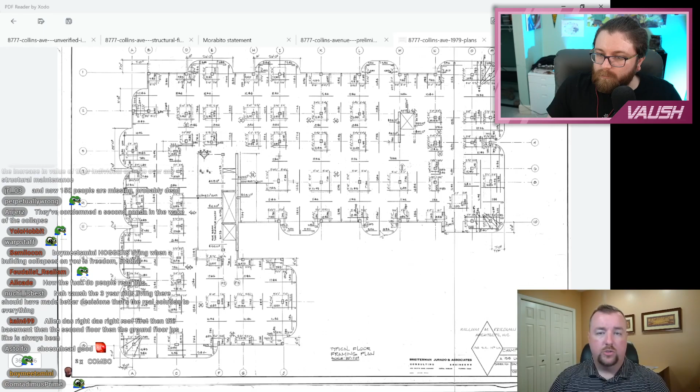All right, so going back to the PT comment, this building is not a post-tension building, as far as we can tell now that we have more data and more information. And by the way, that's good news, because that means the portion of the building that's still standing is actually a bit more structurally sound than I originally thought it was. So that's good news. The remnant.

This is one of the 1979 construction drawings, and this is the typical floor framing plan, okay? None of this needs to necessarily make sense to you, but these little rectangles here are columns, okay? And these notations, like where it says 16 number 5, that's the size of the rebar, so this is obviously not post-tension cable, it's talking about conventional rebar.

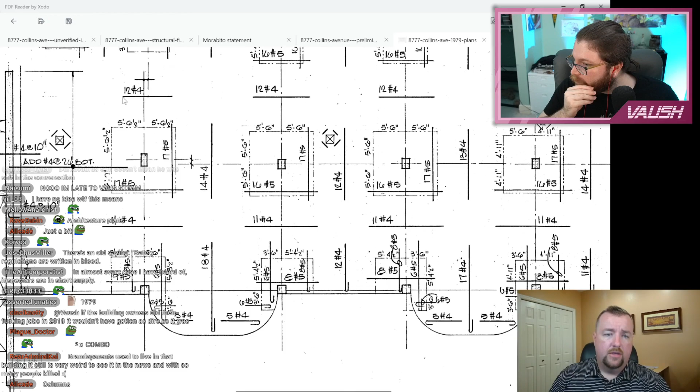Here it says you're to locate 14 number 4 rebars in this area, 12 number 4 rebars over here. I just wanted to show you that the 1979 plans don't mention post-tension cables, they just show conventional reinforcement.

If you look at the construction drawings put together by Morabito, this is their typical detail, put together in 2021, it looks like, finally dated in 2021. This is part of the permit set that was in progress. And you can see that all the details, again, you don't necessarily need to know how to read these, show all conventional reinforcement.

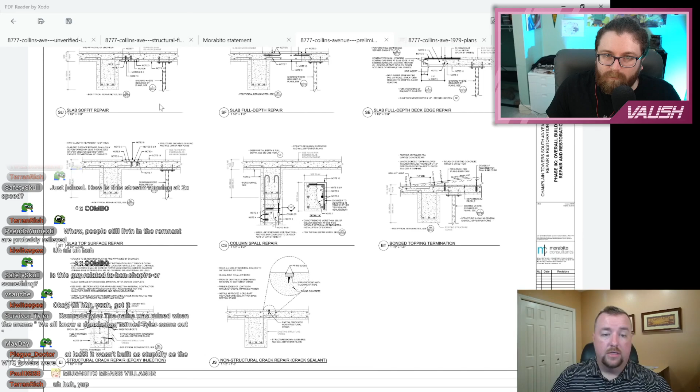These little dots that you see here, that's basically just conventional rebar. That's how you would show conventional rebar. And then the solid line above it is a piece of rebar going the opposite direction from the little dot. The little dot's kind of coming in and out of the screen.

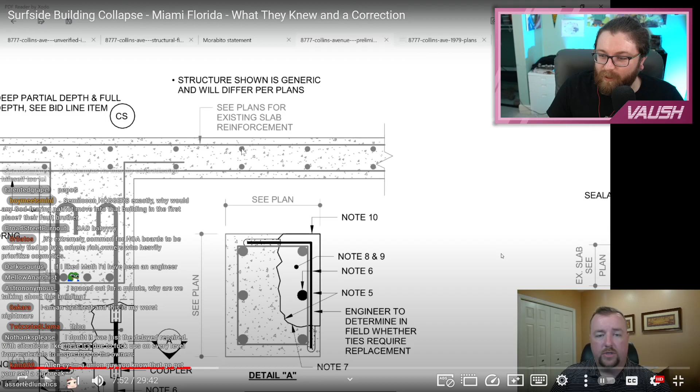Yeah, I took 2 engineering classes, not engineering, 2 architecture classes back in high school. And they were so much fun. You had to draw out the plans and measure the thickness of walls and stuff. And we did a little project where we built it with little wood and made a mock-up of the house and everything. Really nice.

And then the line above it is going parallel to the screen. So it's showing that this is just existing reinforcement mat. One of the things I do want to comment on, because if you remember from my first video, and I repeated it in the second video, I said, look for columns. Columns are an issue. I did think it was interesting.

This detail allowed the contractor to go ahead and excavate. You can visibly see this is like a sample excavation area. It allows the contractor to excavate into what we call the core of the column. The core of the column is contained within the rebar mat, okay? And that's very odd and unconventional to allow that.

But at this point, we don't know that the contractor was actually doing any work to columns. So I can't say that they were doing this and that's what caused the building collapse. I'm not making that assertion at all. I'm just simply saying that this is a very interesting and odd detail to me. In our details, we do not allow anybody to go into the core of the concrete column without getting our permission on every single location and having the appropriate shoring plans put in place.

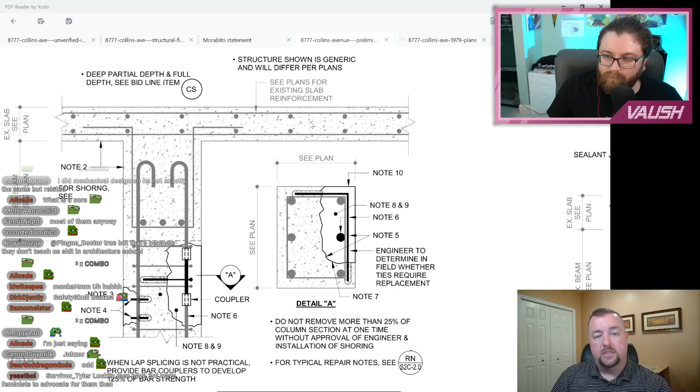So the engineering firm Morabito Consultants put out a statement on their website, and I'm just going to go over some of the highlighted points here. And they state, which I've already said, in 2018, Champlain Towers South Condominium Association wanted to do their 40-year recertification of the condo building as required by Miami-Dade County and the town of Surfside.

Is a 40-year recertification an ordinary length of time for that? Is that considered to be a standard? Is it normally less or more? Yes, okay, it's standard. Okay, just wondering.

So this is their statement that they press released just today, it looks like. Let's see, it says, our report detailed significant cracks and breaks in the concrete, which required repairs to ensure the safety of the residents and the public. So they're talking about their 2018 report, okay?

The association engaged their firm again in 2020, so that's how we knew that they were hired. And then at the time of the building collapse, roof repairs were underway, so we kind of talked about that. That was a little odd that they're doing the roof first and not last, but again, they may have reasons for that. But they're stating that concrete restoration had not begun, so that's why I didn't want you to get too hung up on this column detail that I thought was a little funny and odd, because they're claiming that none of that work had started anyway. So that's not that big of a deal, or may not be that big of a deal.

Although I did highlight this little note, which I thought was interesting. It says we do not provide construction-related services such as building repair and restoration contracting. So they are not the contractor that actually does the jackhammering and the concrete mixing and stuff like that. And that's just like our firm, Consult Engineering. We would only provide the consulting services, the oversight services. But this statement's a little bit of a CYA, if you will, because they're kind of trying to deflect responsibility. Yeah, they're distancing themselves from the...

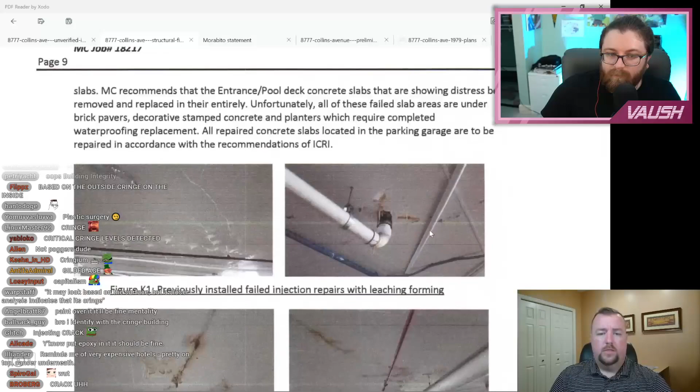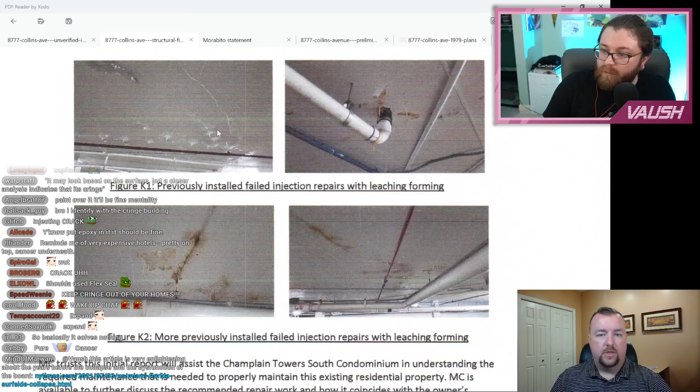Here's some photos of the ceiling. Here are the epoxy injected cracks, and they left the ports in there; whoever that contractor was didn't clean it up and didn't finish it. This is work prior to 2018, because remember, this report was done in 2018. Here you can see rust coming through cracks in the garage ceiling, and you can see these lines. These are essentially stalactites, which is a formation of calcium carbonate coming down from the ceiling. So it takes a lot of water to create 6 inch.

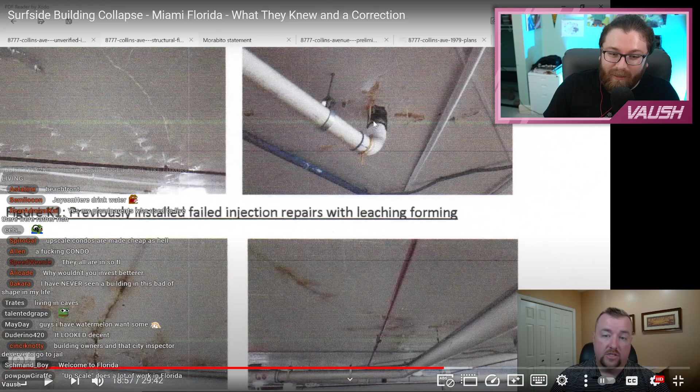Wasn't this a relatively upscale condo unit? This isn't like government housing or whatever. These are decent condos. Yeah, this is like luxury living. Can you imagine living in a penthouse in a condominium and driving your fucking Rolls Royce into the parking garage, and there are little poop stalactites coming from the rotting ceiling? 1 inch long and 3 inch long and 2 inch long stalactites.

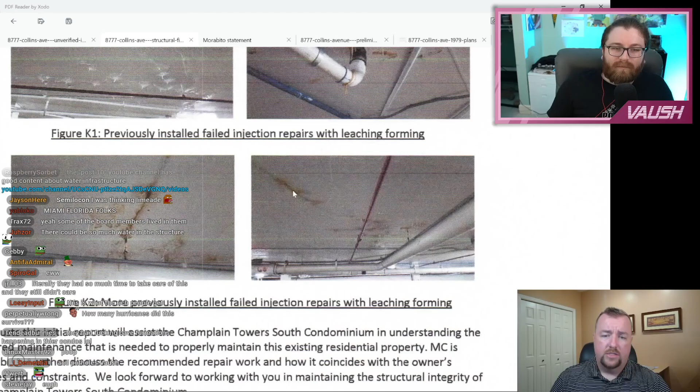You can also see the stalactites on these photos over here on the left. And then you can see more rusting on the ceiling of the parking garage. So that's essentially the bulk of the report. There's lots of commentary in there. One of the things I didn't really find in the report was a statement stating the severity of the life safety concern. That's something that we always put in all of our reports.

We put it in writing, but that's not to say that Morabito didn't come in after the fact and send some sort of letter or a certified letter or had a communication. Because sometimes engineers think, okay, well, we're about to restore the building anyway, so I'm not going to tell them it's like this giant life safety thing because we're going to get the building fixed next year anyway. And then the client never calls you back.

The board of directors. And so then what you would need to do is you would need to send a certified letter saying, hey, listen, we failed to tell you in our report how serious this is. This is super serious. You need to take care of it right away. So Morabito may have done that, and they may have done their due diligence on that. But I can tell you from looking at their photos and reading the language in their report, this was a building that was severely damaged.

Most buildings that I restore, and I think I've said this in the second video, don't look this bad when I finally get there. Sometimes they do, but rarely. Okay, and then here is the form that they had to fill out for the town of Surfside, and I just wanted to note two interesting things. The same engineer who did the other report filled out this form for the town, and under the concrete framing system, which is essentially talking about the main skeleton and main structural members of the building,

it says general condition description, and this is the only description given: overall, the concrete framing is in good condition with the aforementioned items requiring attention. He mentions various concrete spalls and stuff that need fixed. But this statement, overall concrete framing is in good condition, this is going to end up being problematic for them, given now that the building has collapsed three years later.

But there is going to be a defensible argument from Morabito saying, well, yeah, it was in good condition in 2018, but that doesn't necessarily mean that it was in good condition in 2021, right? So they're going to have some defense there.

It seems like they really didn't want to commit to the disaster level approach on this. Like, how can you say concrete framing is in good condition, but also in the previous segments, you saw the giant hole in the pillar and everything? I don't know. It seems like they wanted to downplay it a little bit.

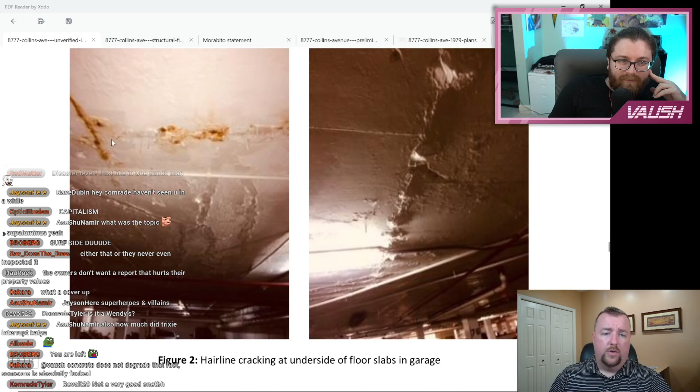In this report, though, they included some additional photos that they didn't include in the other one, so I thought it would be good for us to look at those. Here is some more concrete cracking in the ceiling of the parking garage underneath the building, and the rust that's coming through, the stalactites that are forming. I'm sorry, the resolution isn't very good. This is as good as I got. Here you've got another pretty severe crack with spalling. So that's kind of an interesting observation there.

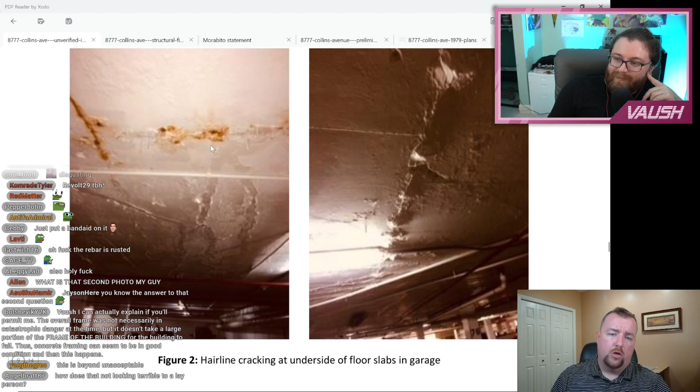I'm not sure what we're seeing here. I think what we're seeing is that there's so much water coming through here that the water's spreading along the ceiling and then leaving efflorescence in different shapes and lines and stuff.

I can actually explain if you'll permit me. The overall frame was not necessarily in catastrophic danger at the time, but it doesn't take a large portion of the frame of the building for the building to fall. Thus, concrete framing can be seen to be in good condition, and then this happens. Well, would you agree, because this guy seems to be making this case also, that the engineering company did not sufficiently indicate the danger all of this posed while filing their 2018 report?

But again, that's a lot of water coming through this plaza deck.